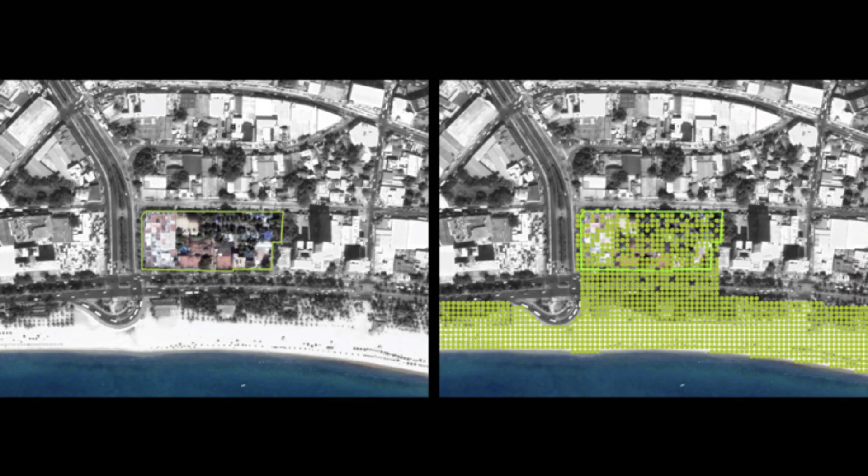So what we started to do, and these are kind of transformational massings, is we started to look first at how we could break down the scale. It's surrounded, and you can see the light white lines, by very small scale residential.

So the given was this very large program. We couldn't question how much program they needed because they needed to house all of these departments, but we could question how you make that mass fit within the larger context. So first we started to shift it around.

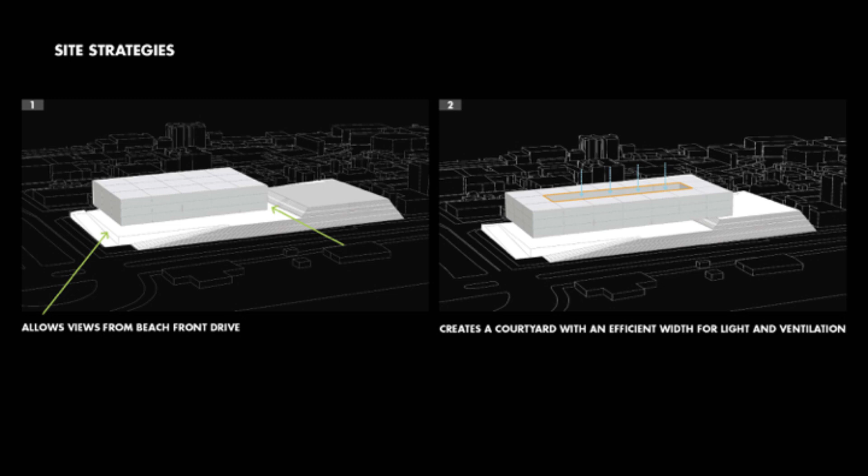The second was the idea of, for each of the government agencies, how would you bring natural light? Well, a typical typology is the courtyard. But again, the massing of that just seemed like this monumental thing that was kind of anti-contextual.

So we started to study how you could break it down further, and the interesting thing was we realized that in breaking it down further, not only did you start to reduce the overall feeling of the mass, but you started to give identity to the 37 agencies.

Because yes, they are all part of this Acapulco Town Hall, but our belief is there's always this interesting kind of tension and opportunity between the individual and the collective. And the empowering power that one has when you identify the idea that any collective, any community is a sum of parts, and how do you acknowledge both?

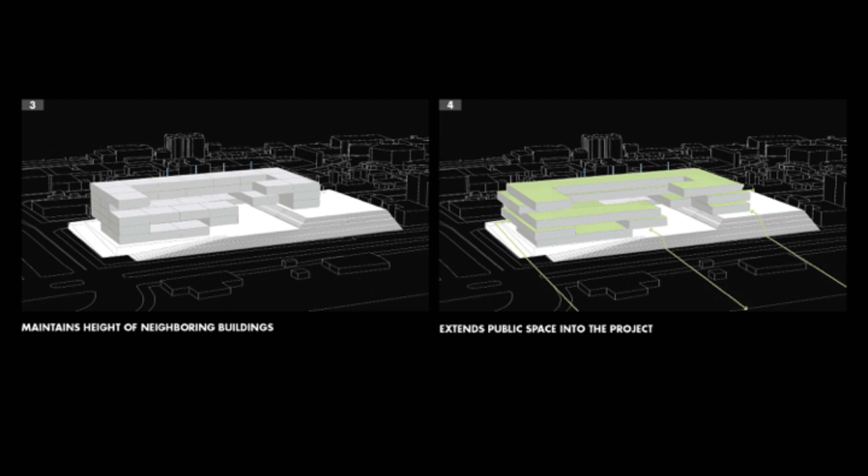And also in doing that, it started to open up opportunities for terraces and green space that then became kind of synergistic, a reciprocal relationship by which one department could start to occupy the green roof of the other.

The other important thing I didn't point out before is that all of this is raised up slightly on a plinth. This was done so the public can actually traverse the entire site, or so they believe—they think they have free access, they think they're accessing a public space, but the private entrances and the secure areas are tucked out of the way. So again, this is about empowering the public to feel like this space is still theirs.

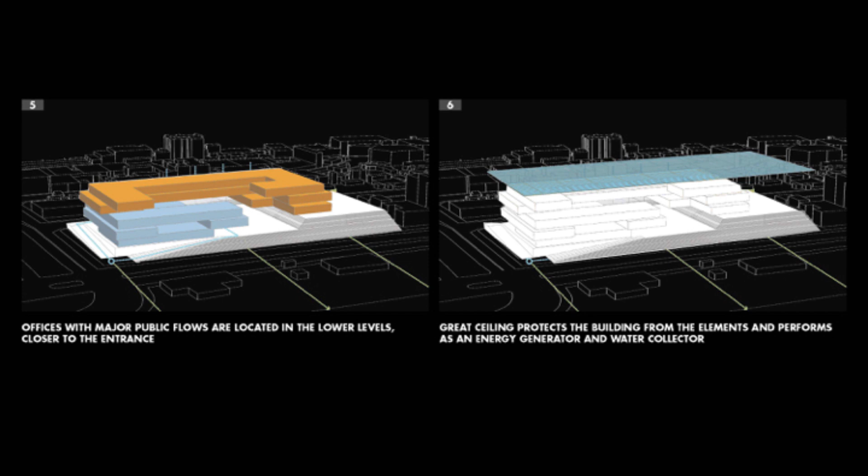It has not been privatized, but we still maintained all the necessary security and secure processions. The final consideration was acknowledging that we could not deplete the water resource, and that they did not have money to power this building or pay for these resources. So we provided a canopy over the whole site. In Acapulco this is ideal because the weather is such that if you just provide shade, you have outdoor space you can use 365 days a year. We couldn't add any square footage to the building because of the budget, so instead we provided public space, common space, terrace space, informal meeting space—all within the outside—while still maintaining the limitations of the physical interior space we were allowed to build.

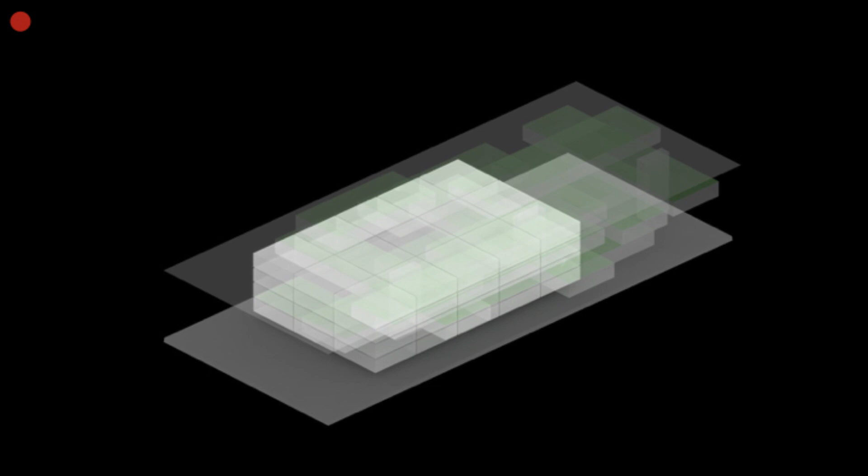No sophisticated graphics here, but you get the idea: the porosity at the ground floor, the stacking of the 37 department volumes, the idea that you create this kind of endless porosity between them.

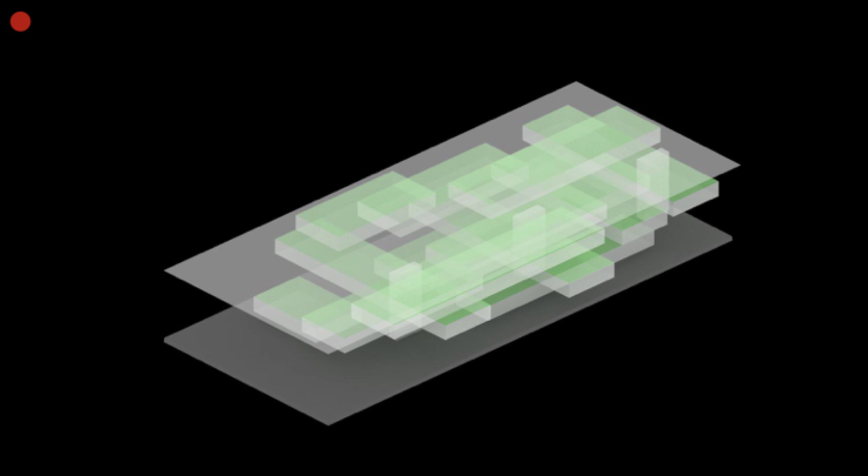In many ways, and this is consistent with everything you'll see—and hopefully something you recognize within your own space—we feel it's not about the object. Our job is always about creating the void, using architecture to sculpt the open space, to sculpt the shared space. If it's not built, it's really the space owned by all.

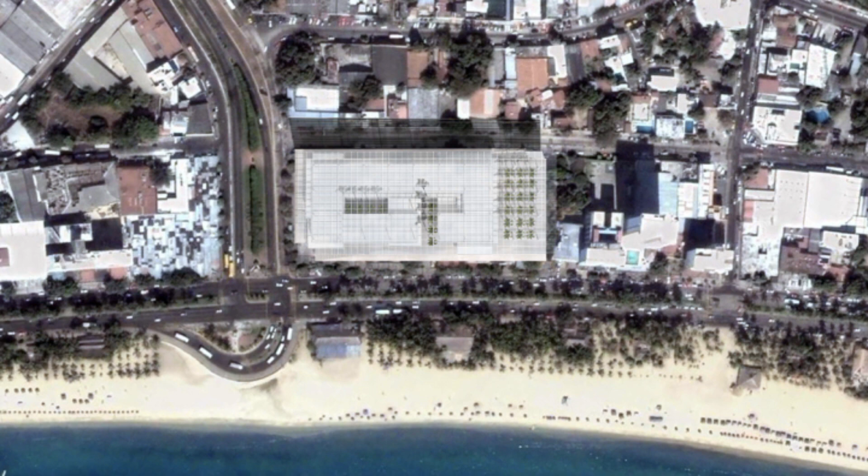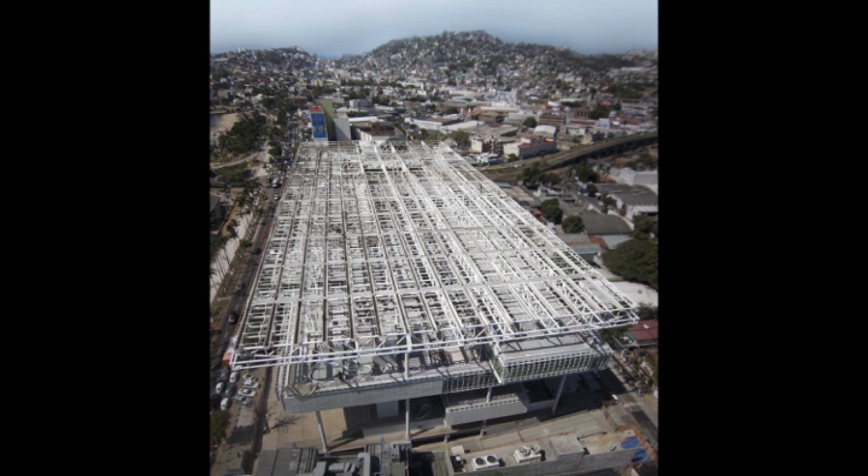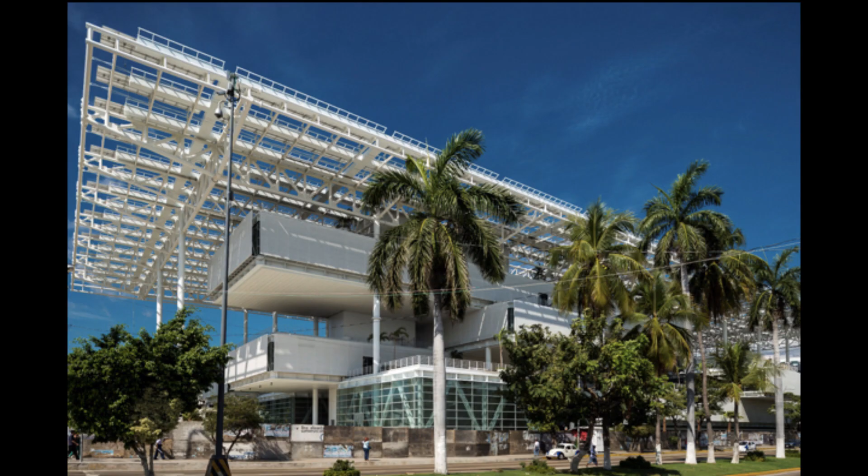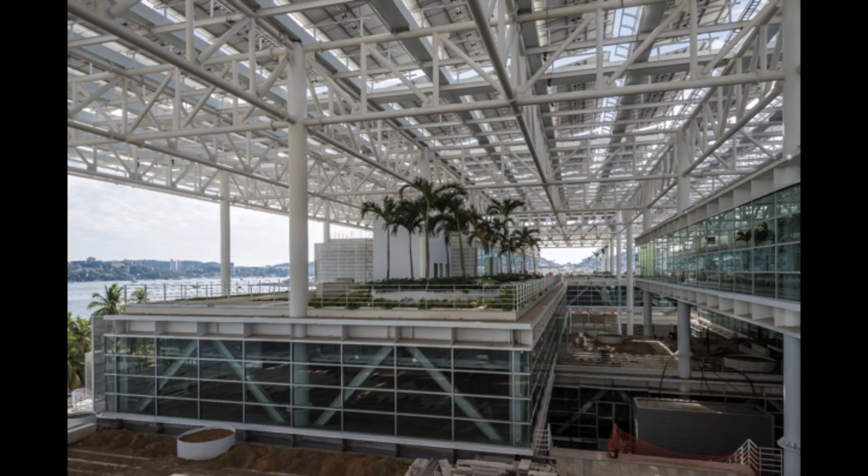In construction, what was interesting about this project—I'll say interesting as opposed to somewhat sad—is that due to the turmoil in the government in Acapulco, if you've read any of the news, this project sat constructed but not occupied for a long time because the government was in upheaval. The interesting thing about that, though, is that typically when you build a building, everyone moves in and then the landscape takes years to establish, so it always looks pretty pathetic with dirt and tiny trees. In this project, because the building sat for so long, this is even before—we don't even have photographs yet of them moved in, although they are now—but you'll see the landscape established, and it really took over the building, which was somewhat poetic.

You can see here the interesting thing about the canopy is that they are photovoltaic panels, solar panels, so the roof does two things: it provides 60% of the power for the building, and it also collects 90% of the gray water for the building. We were told our role was to design the building, not to help them operate it or pay for the operation, but we recognized that if we did this from the beginning, we could add more value, because architects and designers really need to think about the longer term of what they put forth.

The idea isn't just about designing the physical—it's the social, the financial, the historical, the cultural. I think any design problem isn't really about what applies; it's about editing what doesn't apply, and you almost have to start in reverse. What's interesting is the project came to us as 'build a kind of dumb office building, make it small, make it solid, make it secure,' and in the end it's become this kind of iconic public space for them.

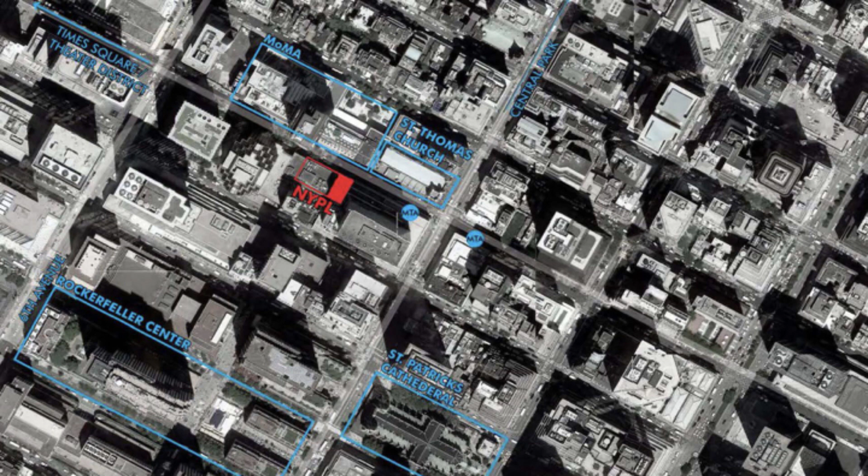Again, what was asked of us—if you're familiar with where MoMA is, on 53rd between 5th and 6th, the red building, it's just across, in a very cultural context. This project, I think the next one illustrates it very well.

It was originally an old library called the Donnell Library. In fact, I know it very well—that's where I went and studied for my architect's exam. I went there every weekend, and I passed. But it was a well-loved library. It was a little dilapidated, and the New York Public Library sold the site to a developer. The community was not very happy. They weren't really brought into that decision, or even told that one day they'd come to their beloved library and find it locked.

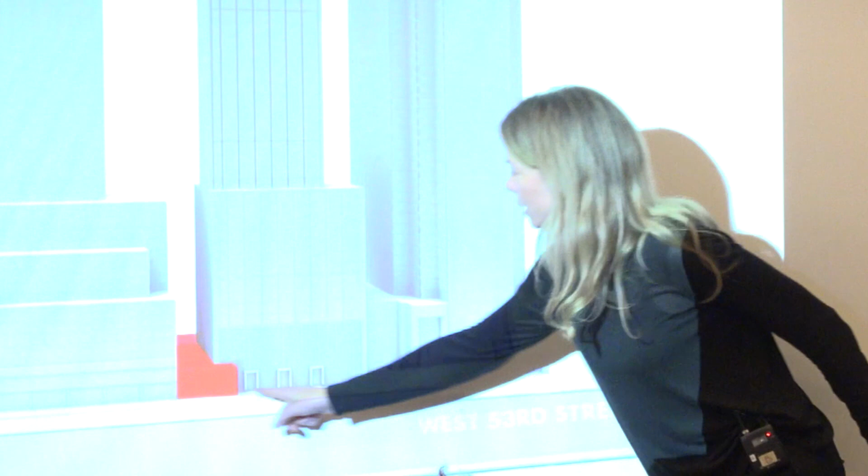But anyway, they sold the site, and as you see happening all around New York City with these public-private partnerships, they sell the site to a developer, and in turn the developer builds some portion of it for the cultural entity. So what you're seeing here is basically our site, and that is what they built—the Baccarat Tower, hotel, and I believe condos. This is kind of the space we were left with.

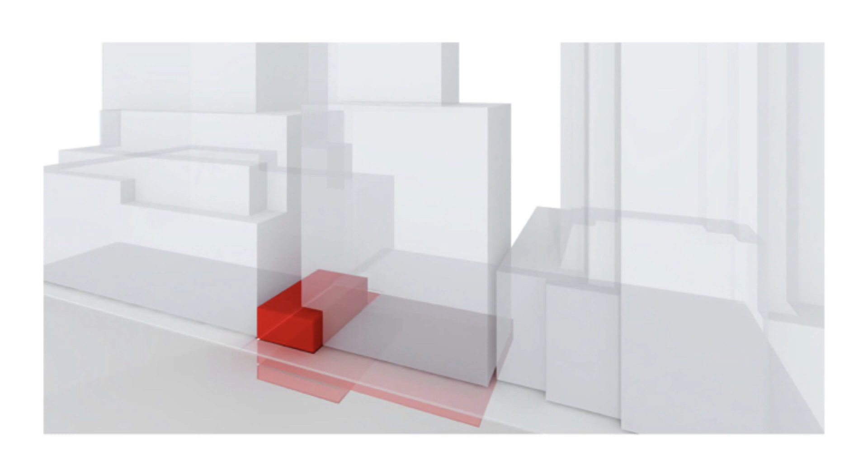What we did have was space below ground. So when we started the project, I read in the New York Times that the library would be the cellar in a mall, which was horrifying to us—we hadn't even started the project, but that was what the community assumed they were being given. They had this larger library, and it was reduced to basically the base of this very private, very elite tower.

So again, we asked ourselves—we were tasked with designing a library, but what did this space, this community, really need? We felt what it really needed was a public space, a civic space. And how would we design a library that, first and foremost, read as an extension of the public realm?

I'm sure everyone's familiar with the main branch on 42nd Street. People look at this and a lot of times talk about its architecture—the classical, monumental architecture. Where I see the power is not in the architecture, but in this civic platform, this civic landscape. I walk by this space twice a day, and you see people protesting, getting married, meeting up, having a sit-down class. It becomes this wonderful platform for exchange and change.

And for us, that was what the library really should empower, because people were even asking themselves what the relevance of a library was, given that we read off our phones and can get any information within seconds. Where was the printed word? We said, well, obviously the printed word is the history, and it's still very relevant, but it's really about exchange of information—getting information, exchanging it—and that information can come from people or from devices. So it's really about providing a place that encourages exchange.

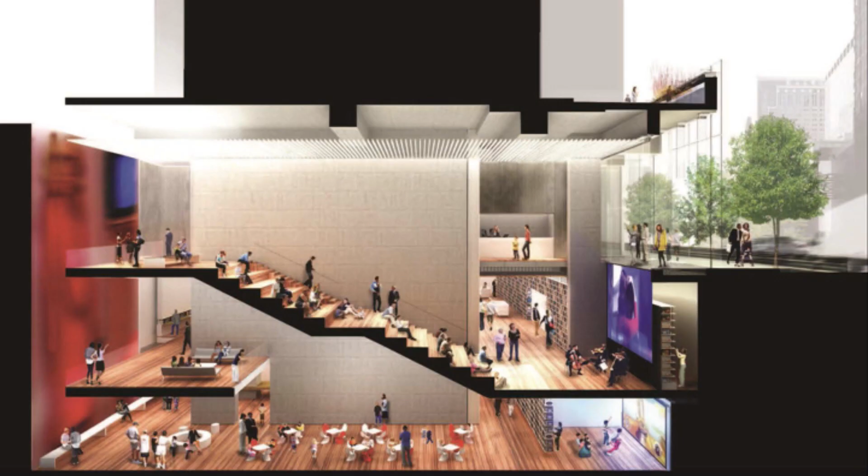Hopefully you see that in your space as well. So this is the concept section we created—this is 53rd Street, and you see the ghosted MoMA to the right. The idea was, what if we didn't have a facade? I mean, it's not Mexico City, it's not Miami, so we needed a facade, but what if you could reduce it so it wasn't about the monumental institution, wasn't about identity as a thing, but the real identity was the community and the actions of that community?

So what we did was, we were given this concrete shell after the developer designed the tower, and we decided it would be amazing if all we did was put this thin glass facade on, as if the community, in a grassroots effort, took over the space. And literally you see the extension of this civic landscape.

Even though our space was already small, we persuaded the New York Public Library—and it wasn't very hard, because they really embraced this idea—to fold the slab down to create this stepped seating that became an amphitheater, a gathering space, a dialogue. The library for us was like a cultural mirror, where the occupants would be in direct dialogue with the residents and visitors of New York City.

So it was not only that move created the literal continuity of this wrapping landscape inside, but again, it put the library in dialogue with its urban context.

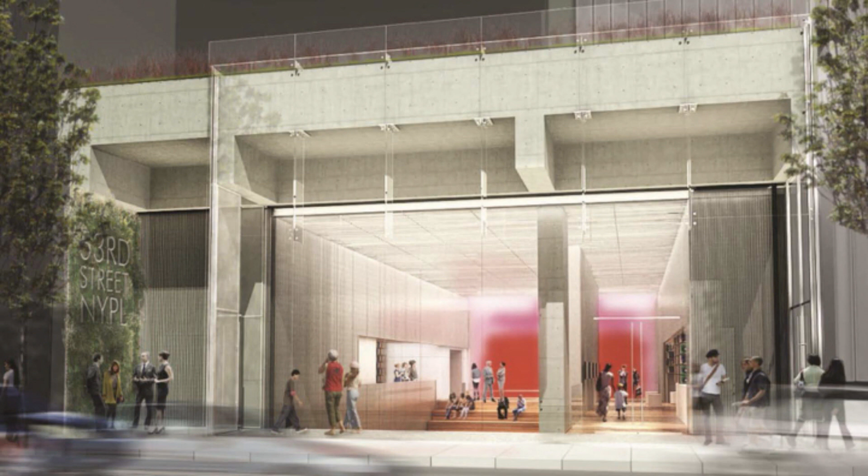They're in the process of commissioning an art piece to be brought to that back wall. From a design standpoint, because it wasn't about any interiority at all, we took exterior metals, this perforated zinc corrugated metal, and wrapped it in from both sides so that you really did feel this was more about the urban environment, not about an interior.

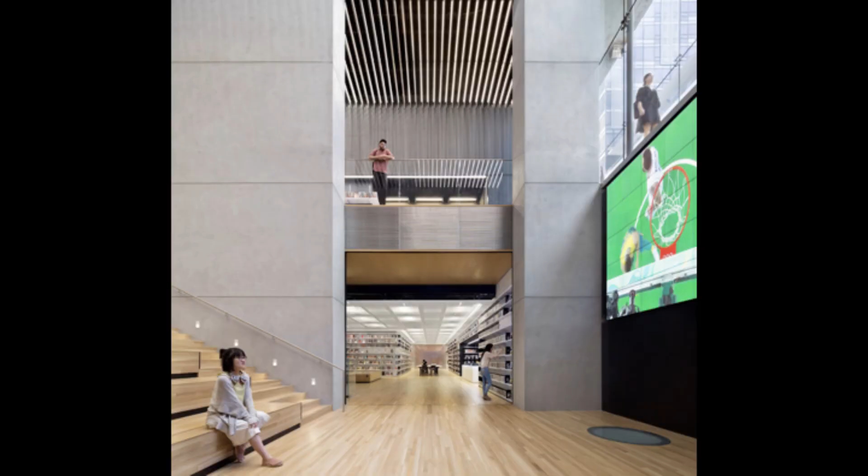This is actually a photograph of the finished work. You can see someone walking out. There's actually a double glass layer so that you feel there's a portico condition, because we recognized from day one that maybe not everyone embraces this idea of the library. They may much prefer the original idea of a library. And ours was not to say what was right. We were not putting forth that this is the new idea of the library, take it or leave it.

In fact, the library is made up of many different gradations of experience. You can go from this first entry, which is the most public, and stay within this very large-scale public space, or go through this open plan—which does not mean lack of differentiation. Any good open plan actually means just the opposite. Think of Central Park: it's about finding your place, going from the most public of spaces to seeking out the most private of study carrels in the back.

But what we wanted to really do was deliver this public space that the library could then do something more with. So this started off as kind of a branch library about the repository of books, and it ended up being this platform by which—here when we photographed, it was during the Olympics.

It was great that they were showing the Olympics. During the photo shoot, there were groups cheering, and groups crying because their team was losing. We tried not to get the crying people into photos—it didn't bode well for the architecture. But again, it's this notion of spectacle, community, and overall engagement.

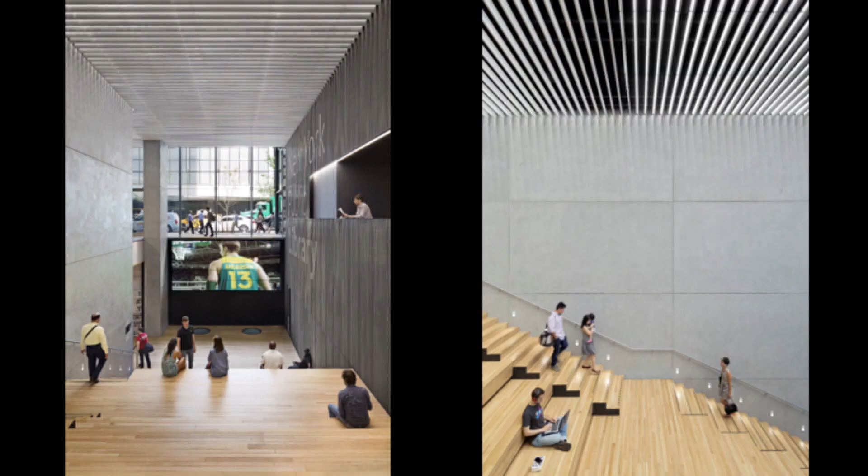Since opening, they host monthly operas, concerts, lectures, panel discussions, art exhibits. You get that sense from the left—you're looking and seeing one virtual reality, and above you've got the real reality.

For us, that really captured the New York condition. When you have visitors coming from places that aren't urban environments, it's a weird sensation to realize that at any point someone might be above you or below you. This vertical existence is something we thought was quintessential to the city.

The budget was extremely limited, so all the materials not only tried to evoke the urban quality, but they're also very straightforward: wood floors, a cement coating, the durability of the metal panels. It's important if you're giving a public space that materials show signs of time in a positive way—things patina rather than getting scuffed. So we avoided any use of sheetrock and other typical indicators of interior space.

The ceilings are perforated, expanded mesh. One thing to note: anything that doesn't seem ideal is always an opportunity.

Where you see the central volume—because this is all one open landscape—that's actually the elevator core for the residential, a huge piece that took a chunk out of the whole space, which was very troublesome to the library. We said, wait a minute, this is an opportunity. If the new notion of the library is this open civic landscape where programming defines what it is and people define what information is exchanged, maybe this little pavilion could be the old notion of the library.

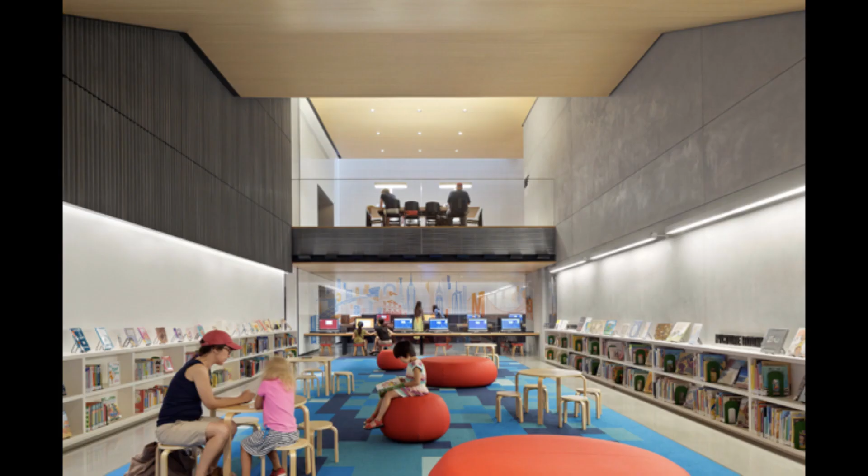Because it started with the book—the book was the touchstone at the start—we liked the idea of wrapping it with shelving, and it became this object within this new space. So the juxtaposition of those things is not about erasing, but more like a palimpsest for the idea of the library. The hope is there's another iteration where they're able to evolve and adapt this space.

So, downtown Brooklyn Cultural District—someone asked me earlier, architecture is not a quick profession, and that's an understatement. It is not instant gratification; this project is 13 years and going, so two more years. If you're familiar with downtown Brooklyn, there's this little sliver of a triangle—Flatbush, Ashland, and Lafayette—not far from Barclays. Barclays is the larger object just south.

Before I left to start my small firm, we had just won an international design competition to build the Brooklyn Visual and Performing Arts Library here. Unfortunately, that was never funded, but in our minds this was always a civic cultural space. Like the library, the site was sold to a developer that created a public-private partnership, and in turn the developer was to provide 50,000 square feet of cultural space.

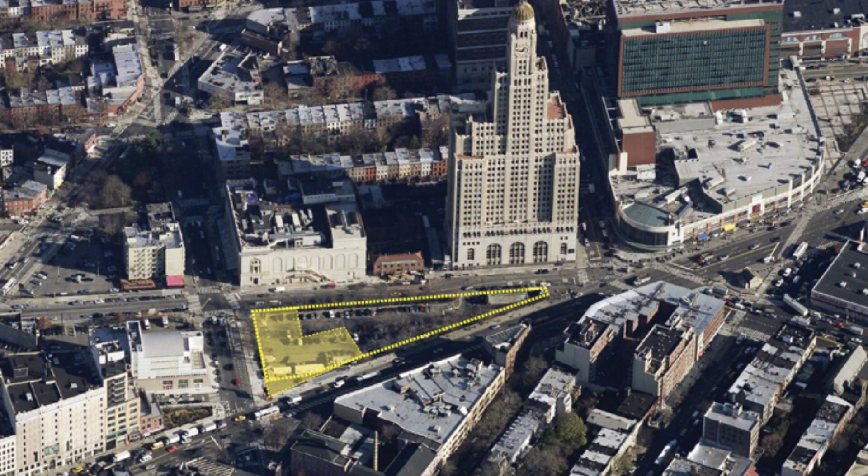One thing to note: what you can do is not always what you should do. We could fill this entire triangle and extrude a very large building—I can't remember the zoning now, since that was over ten years ago, but basically a very tall tower to the property limits as of right, meaning we didn't have to seek special city planning approval. But for us, because of our mission and how the project started, this wanted to be a civic space. If you're familiar with Flatbush Avenue, it's highly trafficked.

There's really not many places to pause and be in this space. So for us—while a private developer purchased the property and hired us because we had past experience with it, and they wanted a private residential tower—we came to them and said, well, you can get what you want, but we think the site requires something else. What we proposed was, in that triangle, as slender a building as could possibly structurally be while still fitting the program. In doing so, we create the solid to actually define the void.

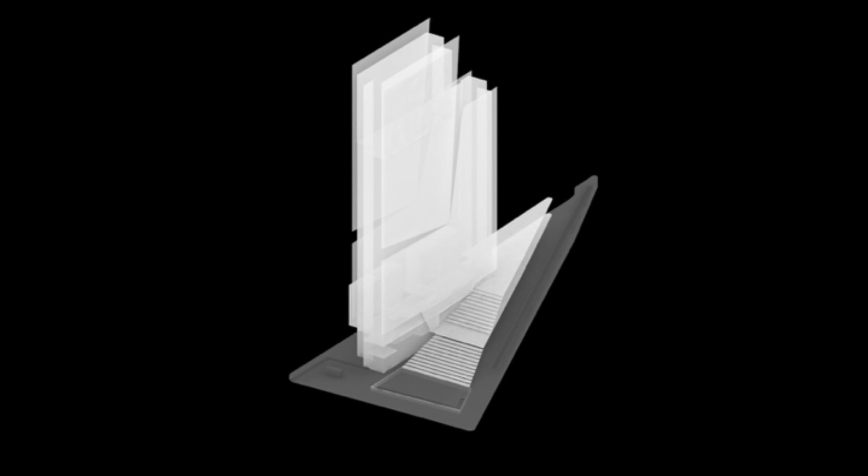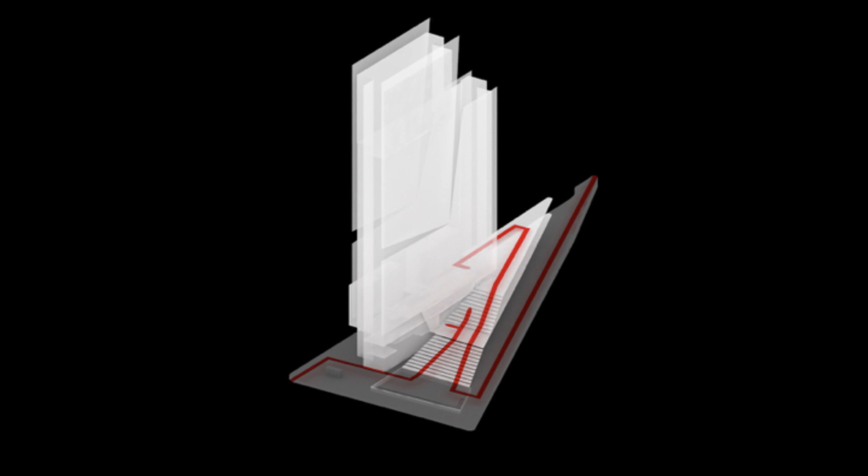We were able to create this open public plaza. The idea being that Flatbush would never be the generous boulevard, at least not now, but you're always designing for a hopeful, aspirational future. The idea was that we would take the public realm, fold it up, and give the public this free, accessible, public civic landscape.

Now, we made a very compelling case to the developer, and you have to understand, your client is still your client. You're hired to provide for them what they need, and what they needed was a residential tower and some retail. So we have to acknowledge that they're not just going to give up the public space unless we can give them a compelling reason to do so. One of the compelling reasons, obviously, in the development world, was always about how close you were to Central Park.

There's the value, and anything that radiates away from Central Park is of lesser value. Now, obviously, that has been completely decentered with the High Line, Hudson Yards, and many of the other developments since then. But it gets to the heart of it, which is people want to be where other people are, where they feel like they're at the crossroads, at some significant center.

So our proposal was to say, well, if this becomes the new kind of center of downtown Brooklyn, this new cultural heart, you would get that. In addition, we knew we still had to provide 50,000 square feet of space for the cultural entities.

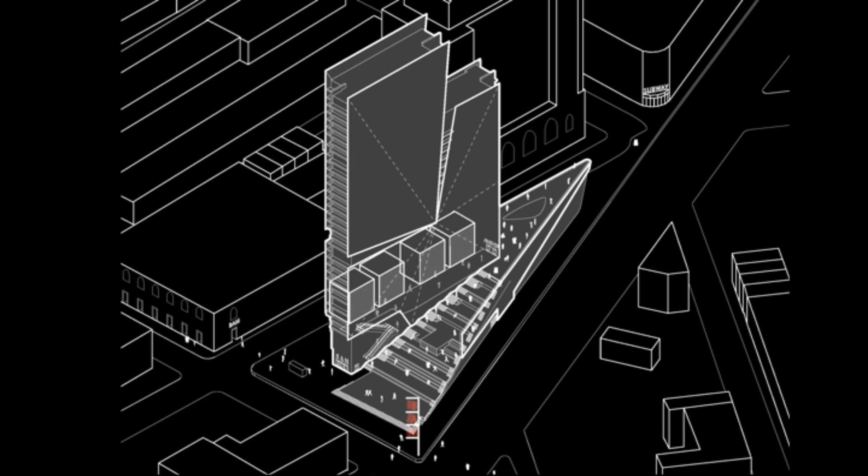Now, if the fact is that the retail really wants to take up the ground, it wants to be on the street, it needs to be on the street for the developer. But the other problem is if you were to take the cultural entities and put them faceless in the base of the tower, there are the Alvin Ailey Dance Studio and all these amazing cultural entities that, unless you've ever popped up on the 4th floor of one of these buildings, you probably don't even know they're there.

Because their name is just simply on a plaque at the front. So what we said was, these cultural entities, these not-for-profits, it's hard enough to exist, but if you cut off their accessibility, their visibility, then we're kind of setting them up for failure.

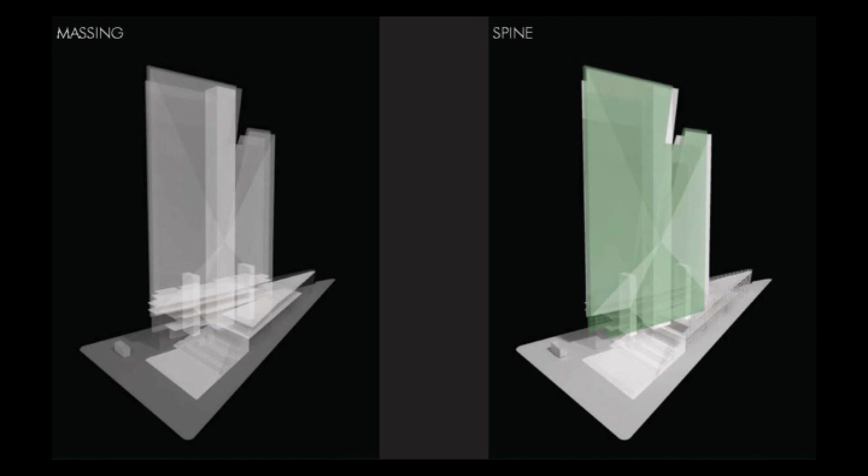So we realized that by folding up the public, we could actually bring the public to them, and create this as a kind of new elevated storefront, which would dispel this idea of a mall condition. So what we proceeded to do was stack the library, the Brooklyn Academy of Music cinemas, performing arts studios, and rehearsal dance spaces, and stack them up.

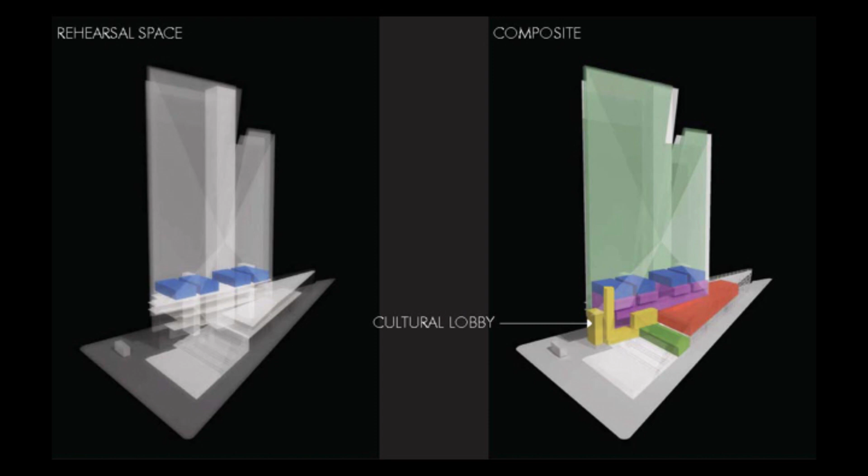And while there is a cultural lobby that you can go to, taking an escalator or a stair or elevators, our preferred, and hopefully the public's preferred, will be to actually traverse up this public plaza and access it directly from the street.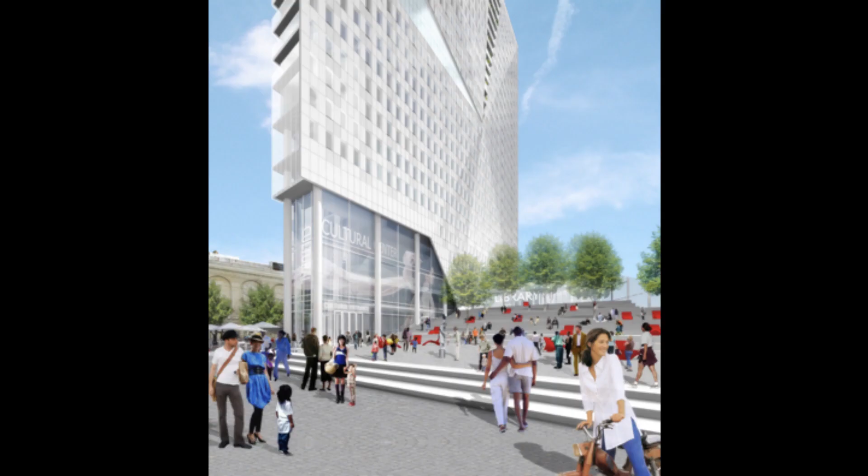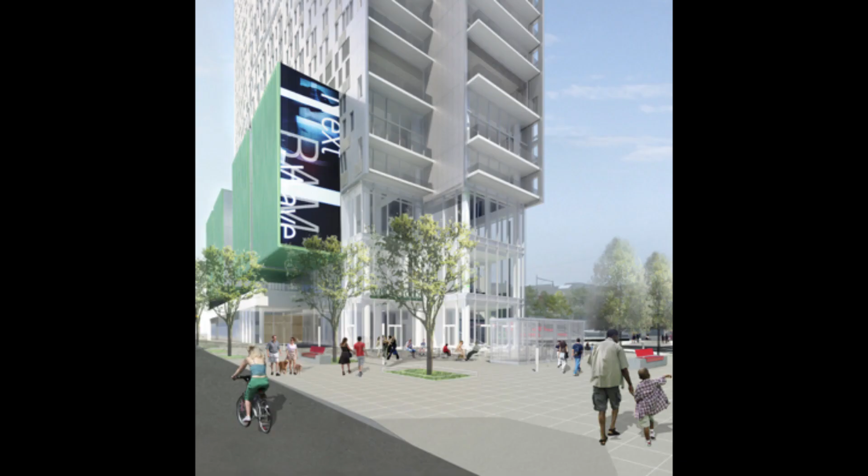So this is an image of the plaza. And why it's taken 13 years is because we were introducing the plaza, and because we were making the building so narrow to create that public space, it was not as of right. We had to go through a ULURP, basically a revision to the land use, and that took 3 years just to get through that process.

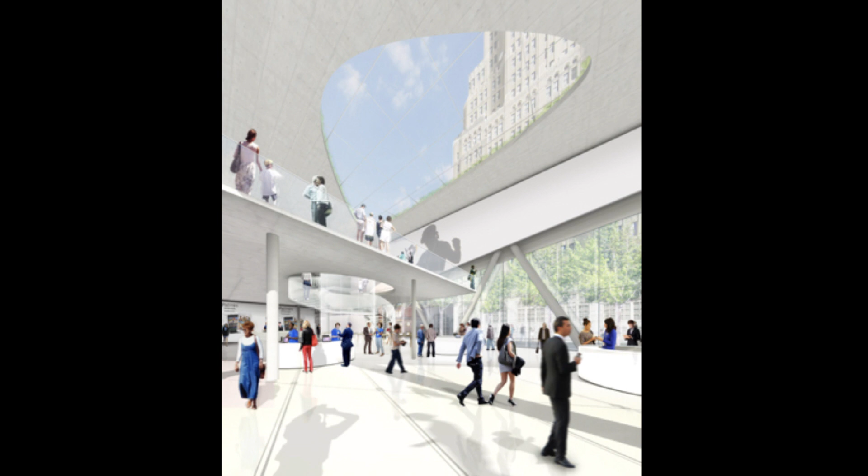This is kind of at the prow, at the point of the triangle, again with the expression. Even the retail was about really folding the public space in. If you're going to be in a space in New York City, you should feel like you're in New York City. I'm assuming we're all here because we love the city or we love urban environments, and I think that's very critical to identifying authentic placemaking.

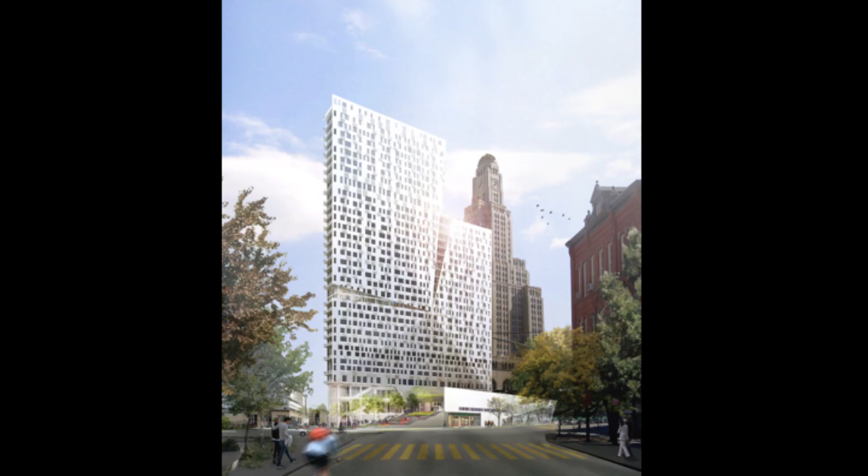And this is a view across, so you see the plaza. For us, we recognize the tower, and even the tower, we always saw it as really not residential, but really a cultural building, which is also why we faceted it and created this very monochromatic metal that picks up on the lights and the ambient colors of the neighborhood, always trying in many ways to dematerialize the tower, because for us, the project really was those first 4 levels.

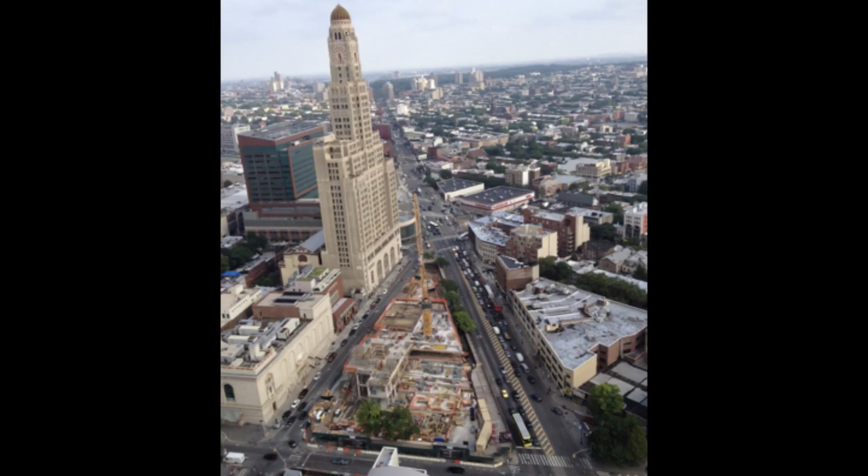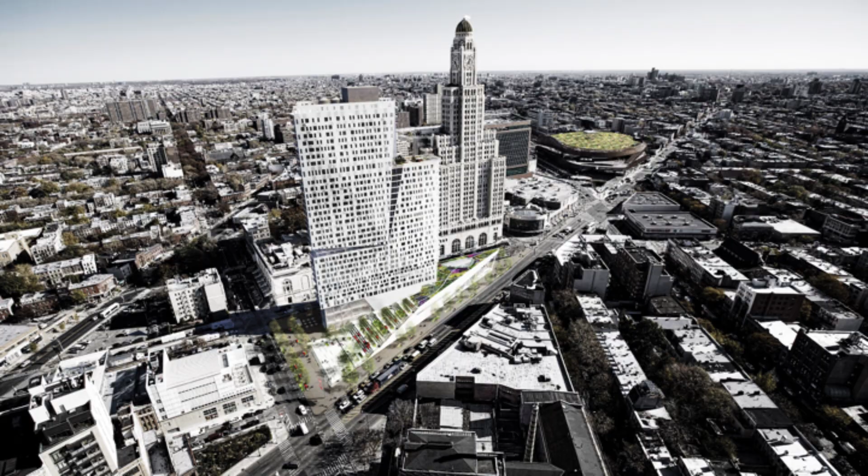And throughout the entire process, it was under construction. The residential tower is actually built and occupied. Throughout this, even though we were fighting for this new civic landscape, even though we were fighting for where the culturals would go and their presence on the street, we actually never met with any of the culturals because they weren't our client. Our client was the developer, and in fact, they weren't even sure who those cultural entities would be since we were looking out so far in the future.

I think for us, the most gratifying thing about this project is we interviewed for the job to work directly with the cultural entities.

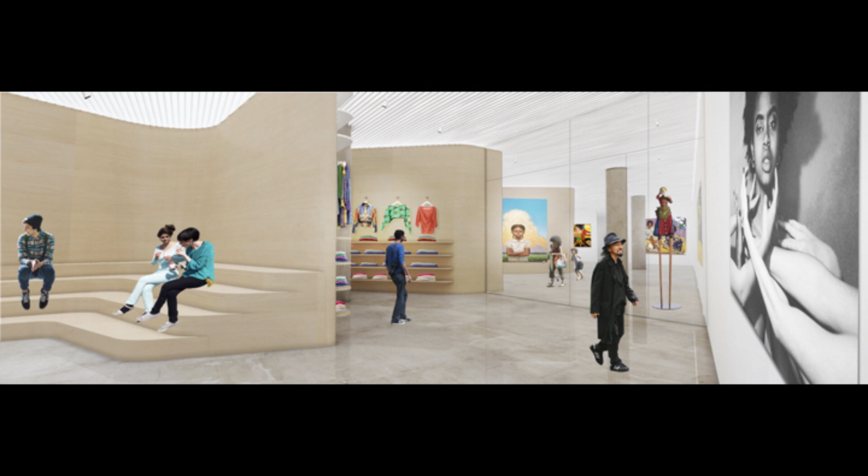We were hired, and now what we're doing is we're working with Brooklyn Academy of Music, MoCADA, which is a local visual arts gallery, 651 Arts, which is performing arts in Brooklyn, and the Brooklyn Public Library, to fit out all of their spaces. The project's not quite done, we still have about 1.5 years of construction.

At the beginning of this, I made it very clear that we would work as a collective. I know each of them had their own interests, and especially when a lot of them are not-for-profits, they have a limited amount of money, and time is short, money is short. But by working together, I know it's a cliche, but it really did become greater than the sum of its parts.

Because they started this interesting cross-fertilization by which the library decided it would not be a small branch library. It would not just be kind of the repository for books that serviced that immediate neighborhood. They would embrace this idea of the performing arts and the visual arts, and their collection would reflect what was going on in the galleries, what was going on in the cinema, whatever film was showing, and it would become more like a production studio by which people could come and record their own work. They had this notion of the human book.

And again, we're so far past libraries used to be where they were very highly curated. Your thoughts were only validated if that book was authored and published and put in that library. Now there's this free exchange of information and of ideas.

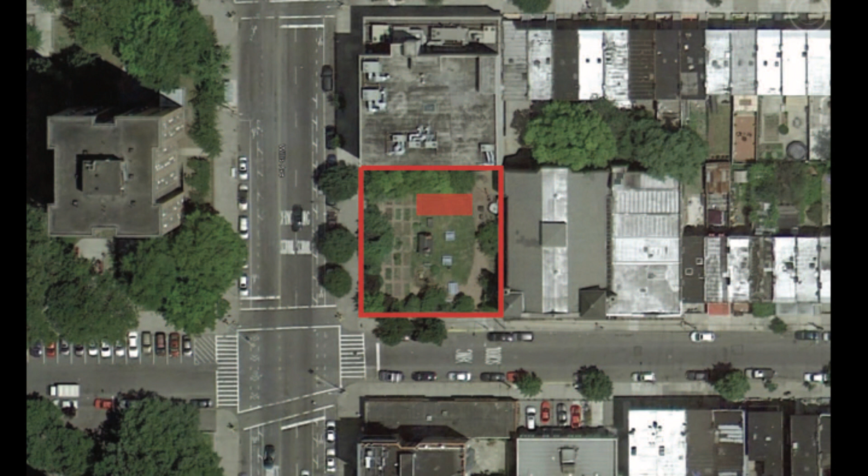And so again, we realized the question was not to design a CASITA for Willis Avenue, because they were such an empowered group. They worked with the community, they maintained the gardens, they grew this produce, they programmed the gardens. So what they really needed was a way to do this themselves.

So our proposal back to them was, well, we won't design it per se. We'll design this kit of parts such that it'll be a modular system, and when you get to the next garden, you'll be able to tweak it and listen, you'll sit down, you'll work with the community, they'll tell you what programming they need, and then you'll use this kit of parts and go from garden to garden.

So we broke it down into really what were the basic needs. The basic needs were really to keep the weather off of them. It was also flexible enough such they could address many different site conditions within the garden. It had to be something that was clearly of a certain scale to promote kind of public use.

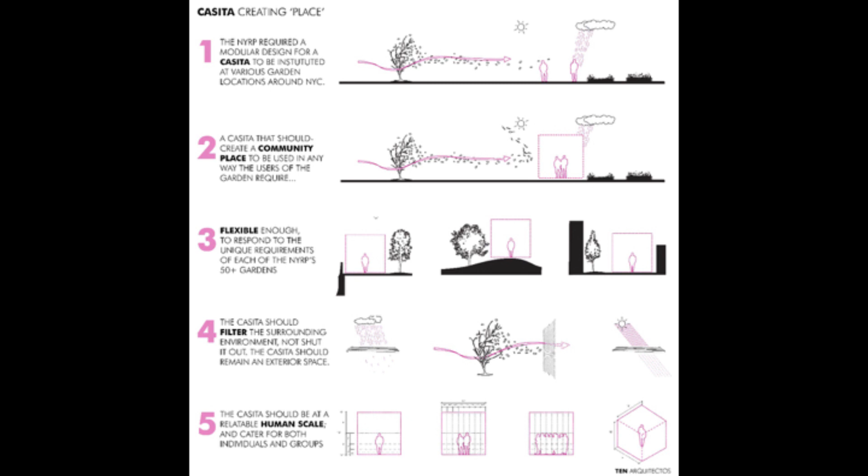And because the gardens do not have an address, there's an interesting quirk in the code, which is if there's no building, then you can't bring utilities to it. So this had to be off the grid. So we had to find other means of bringing power and water to the site.

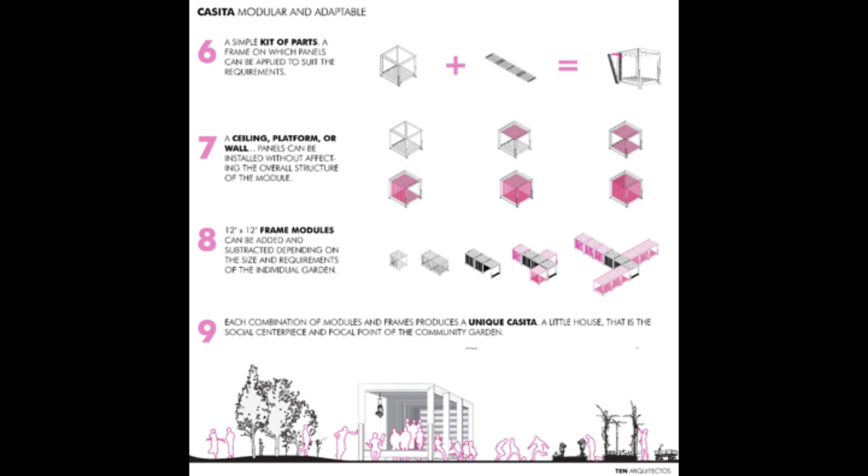So we identified this kit of parts, thinking more like IKEA. If we could give them this brochure by which it could be put together - although you have to be honest, IKEA is not that easy to put together - but the idea was they could pick what sizes they needed. And with that checklist, know immediately how many screws they needed, how many boards they needed, of what length, of what thickness. It would be just very accessible.

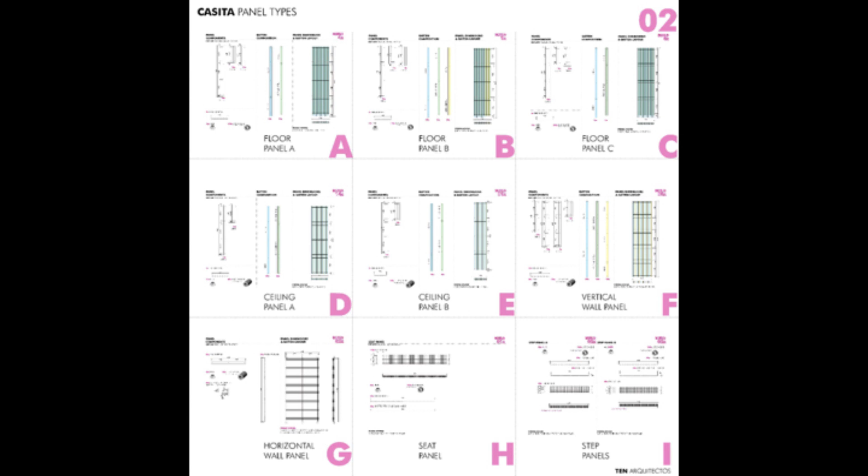Because again, the other projects were about physical accessibility. This is about accessibility to resources and really accessibility to your own community, to realize that you really didn't have to reach outside to provide for yourselves.

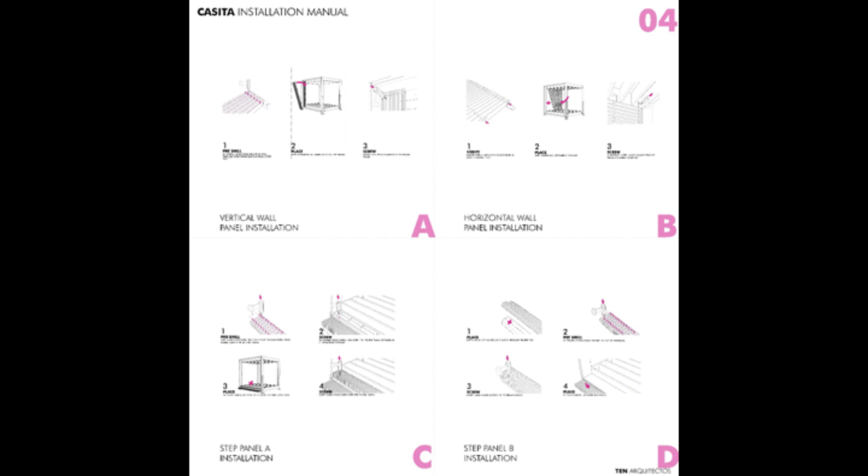And of course, there's always the prototype. So we went through it. We had some bumps, certain things where we had to make changes just to ensure that people could, in fact, build it themselves.

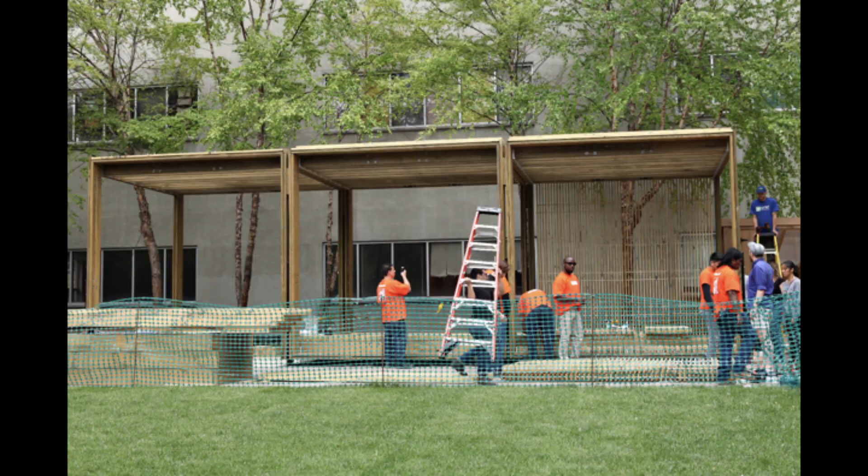And this was 3 of the modules, because for this particular garden, they wanted kind of a bandstand. They wanted also big enough for a classroom, for dominoes, for yoga. They do have a lawn, and they have the community gardens.

Our hope is that in the future, we do have water coming to the space, because the roof itself and the adjacent roofs - we talked to the neighbors and are actually gathering water from the adjacent roofs to bring to the drip line irrigation. They just secured funding for photovoltaic panels that will go on top that will provide the...

Wi-Fi connection, because the other interesting thing about the gardens is they were losing some of the generations, they were losing some of the different age groups, but by bringing Wi-Fi, they could actually bring the community back. Sometimes it's the invisible systems that are the most powerful.

And then the wood is also just about providing shading, but also allowing the air to permeate through. And again, we gave them a piece of infrastructure. You could call this architecture as public place, public space. You could call this architecture as territory or architecture as infrastructure. We would hope it's maybe a little of all 3.

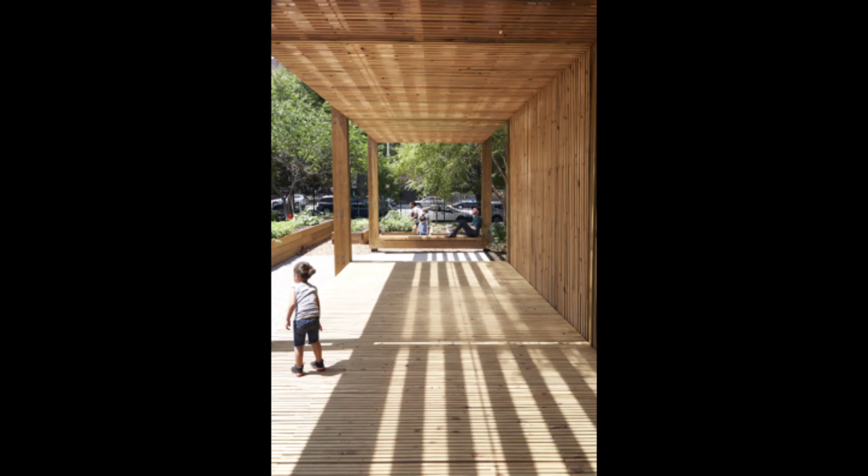But more importantly, they improved upon it. It was just a starting point. And they've really embraced it. And again, it really just becomes an armature by which they create their own identity.

So it wasn't - the question was, will you design a pavilion? Will you put your brand on this structure? And ours was, how about we just give you the tools to create your own? And I'm happy to report that since then, they've actually built, I think, 2 more in 2 other gardens.

So that's working. MUTEC, this is in Mexico City. This is the only one that's still in design.

Again, we were asked to design a museum for energy and technology adjacent to the largest urban public park in Mexico City. Similar to Acapulco, the struggle was, you can justify bringing a resource, but we can't justify taking one away. So we did not want to bring this object into the middle of the park, or even adjacent to it, and potentially take away from what is already this thriving, vibrant public space.

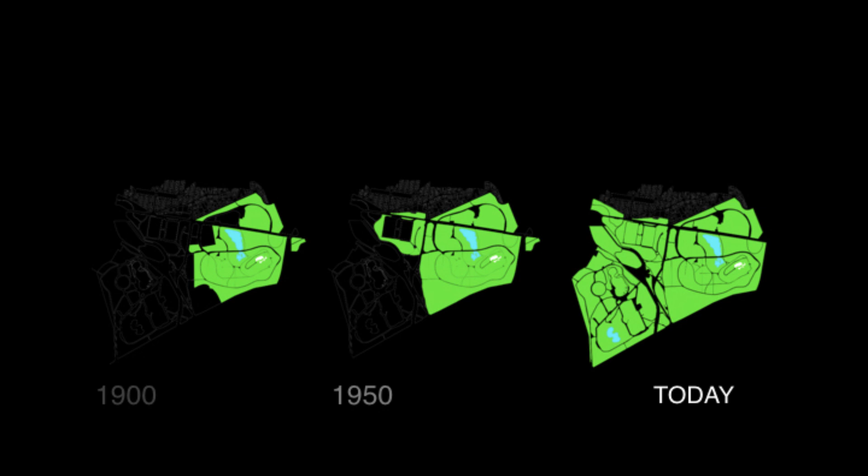This shows the evolution of that park, and you can see just how amazing it is within the context of Mexico City. The density of Mexico City required that we not take one square inch of this park. In fact, what we decided was, what if the challenge was not how little we can take away, but how much we can add? So our proposal was, what if the museum was entirely underground and we extended the park? We actually extended quite a substantial percentage of the park itself.

The idea being, because with the museum you don't have to pay, there's already this notion of accessibility. But what we found with cultural entities is there's still a hurdle. So many people don't use museums, so many people don't go to galleries. Why is that? Is it a financial hurdle? Is it a social hurdle? Is it one of education, where people feel they don't know enough to enjoy the exhibits? Sometimes it's just a matter of not feeling like you're at the right place at the right time, or being presented or even confronted with the opportunity.

So, going to what I started with, how do you weave this together? Even though this is technically a public program, there's still some sense of private program when you come to a museum. It does not seem like a full extension of the public realm. So we really wanted to figure out some way in which we could stitch this seemingly private and public space, so that it really did promote this absolute porosity.

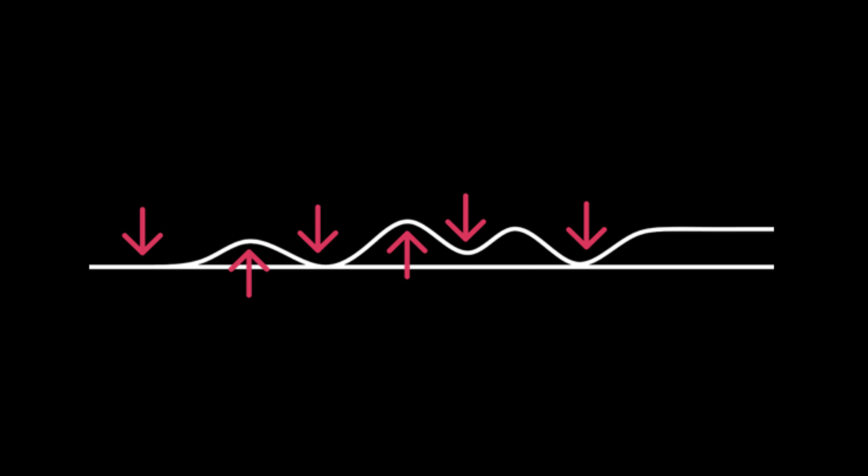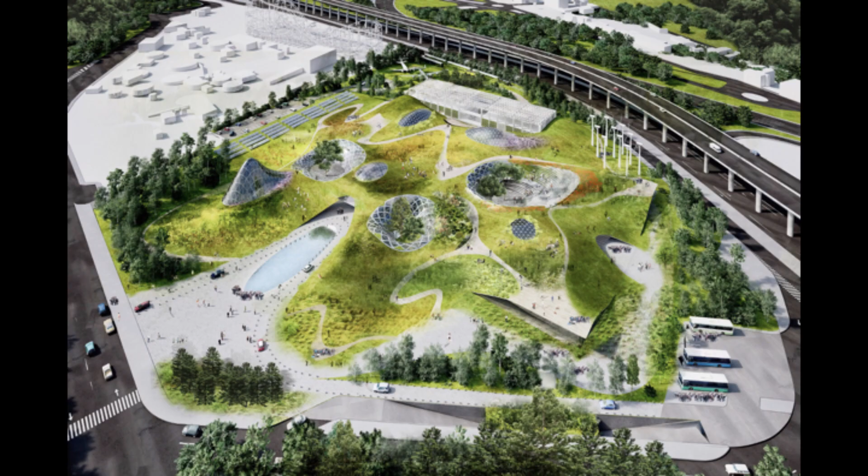So we started to look at how we could embed the museum program itself within the landscape and create this new topography, this new landscape with the museum. This is an aerial of that proposal. The idea being that if you've come to the park, you might witness the outdoor water features, hear a concert in the open amphitheater, and then start to find your way into the interior museum itself. Similarly, if you come to the museum, you start to trickle out through different perforations into the park, hoping that one kind of influences and reinforces the other.

The other thing too is we really embrace all of the disciplines. Our structural engineers, mechanical, acoustical, lighting, sustainable - they're collaborators. We don't come up with an idea and then tell them, make it work, because then you're working against yourself, it's going to cost more, and it's just not going to be successful.

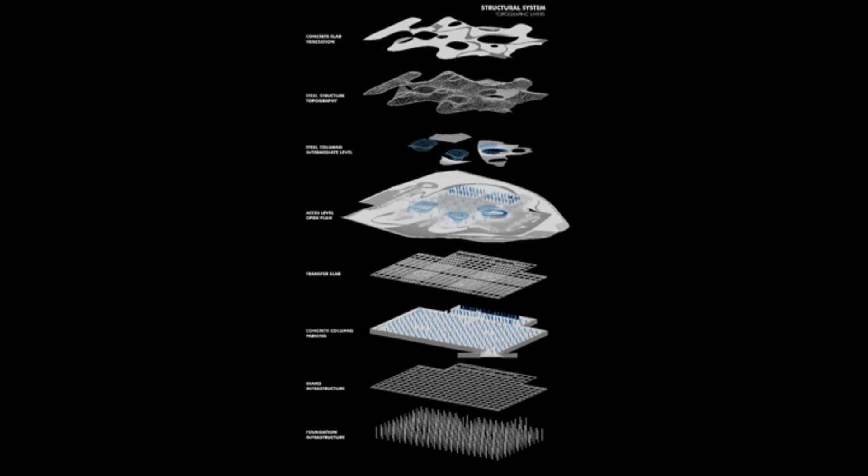So we worked very closely on what is the rational structure. How does this topography not only encourage this public-private interconnection, but how does it capture rainwater? How could we promote the idea of reducing the heat island effect? How can we, by cutting very strategic moments in the landscape, bring in natural light that's actually conducive to museums, as opposed to detrimental, where most museums block it out? Each one of these is a direct response to all of the feedback from the consultants.

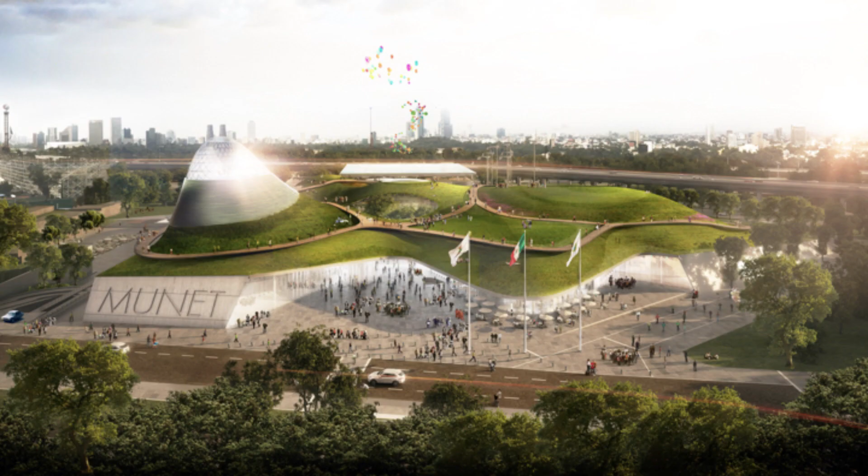And you can see, again, off of the street, and trying to stitch it - you're always building a piece of the city, whether it's a casita that's 10 by 30 feet, or whether it's 300,000 square feet. You're always building a piece of the city, and how you can stitch that in and make it this meaningful impact, and again, a catalyst.

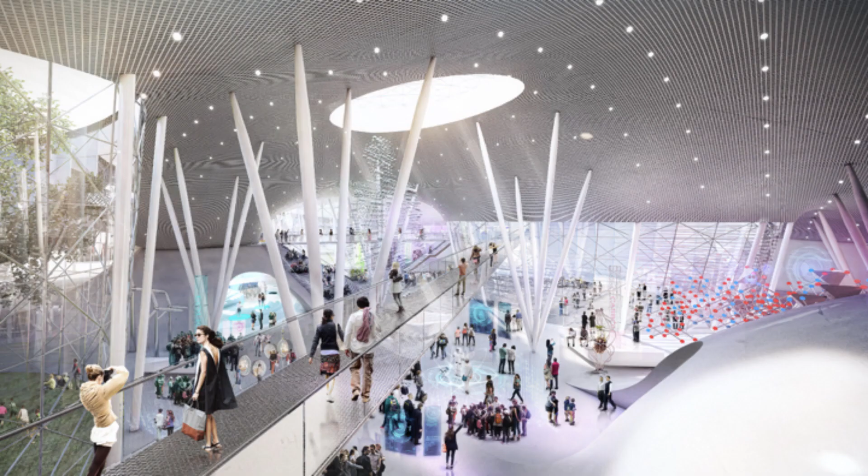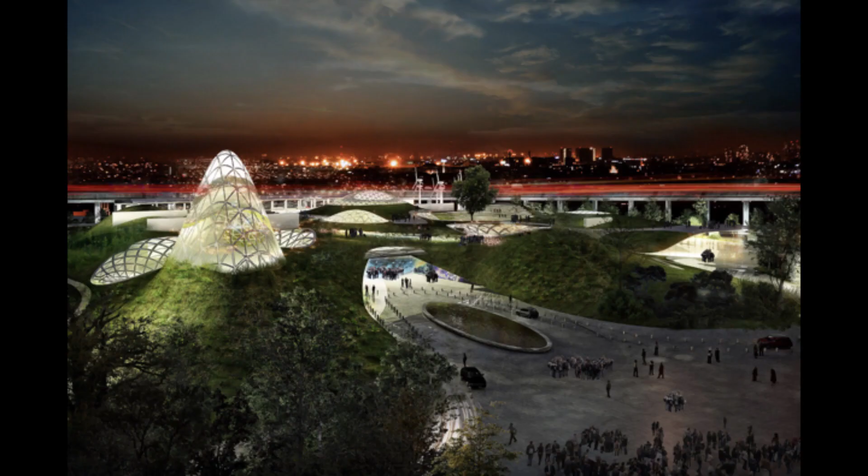In the interior, you start to see the focused daylighting, and this is the planetarium. This is actually one of my favorite moments - this idea that the building literally integrates itself within the landscape, and you start to understand how that program spills out. This really does become that moment by which the park and the museum come together as one collective audience. Thank you.